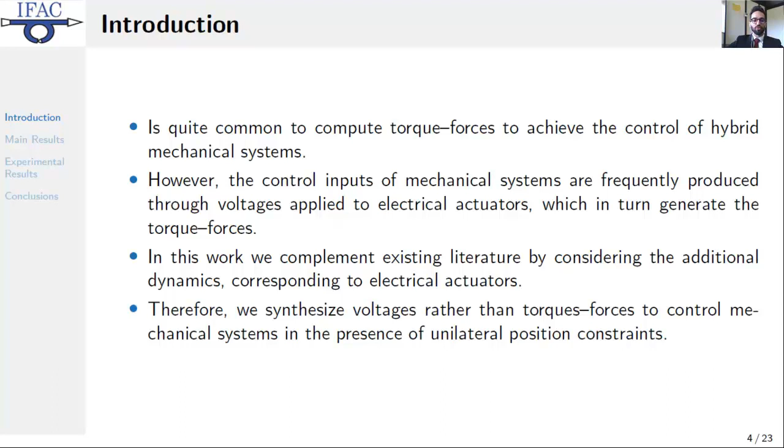It's quite common to compute torque forces to achieve the control of hybrid mechanical systems. However, the control inputs of mechanical systems are frequently produced through voltage applied to electrical actuators, which in turn generate the torque forces. In this work, we complement existing literature by considering the additional dynamics corresponding to electrical actuators. Therefore, we synthesize voltages rather than torque forces to control mechanical systems in the presence of unilateral position constraints.

Now we would like to show our main results. Let's start with the problem description. Consider Euler-Lagrange and actuator dynamics along a unilateral constraint.

F0 depending on position, which is greater than 0. When this is the case, our dynamics are given by these equations, where here we have the system dynamics, and here we have the actuator dynamics.

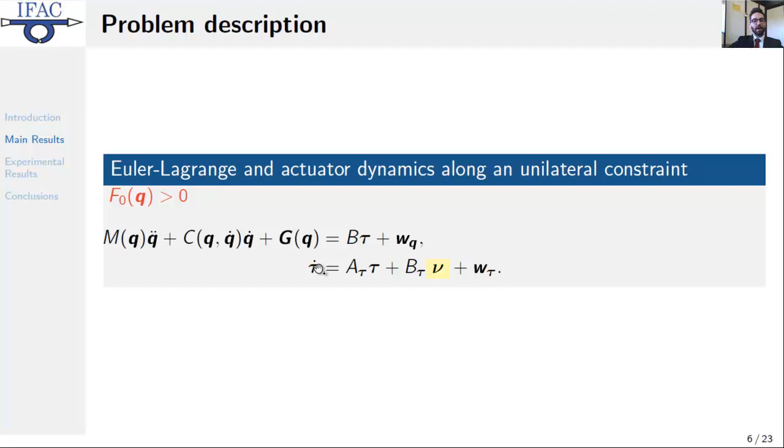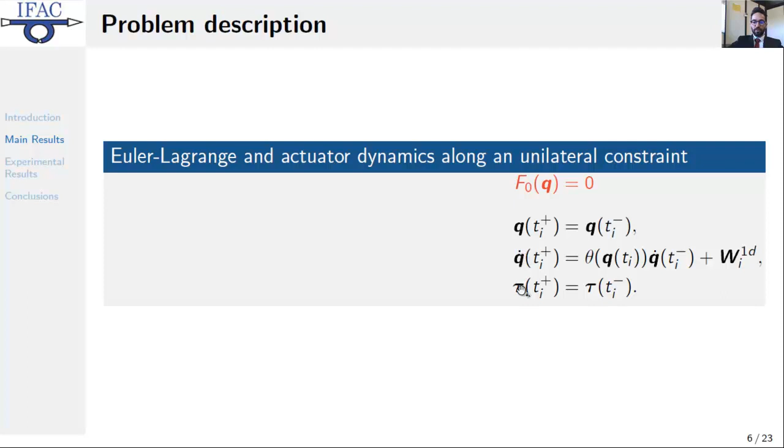Then, when the unilateral constraint is in place, position, velocity, and torque satisfy these equations, where the newly introduced variables W Q, W tau, and capital W are perturbations, and nu is the control input

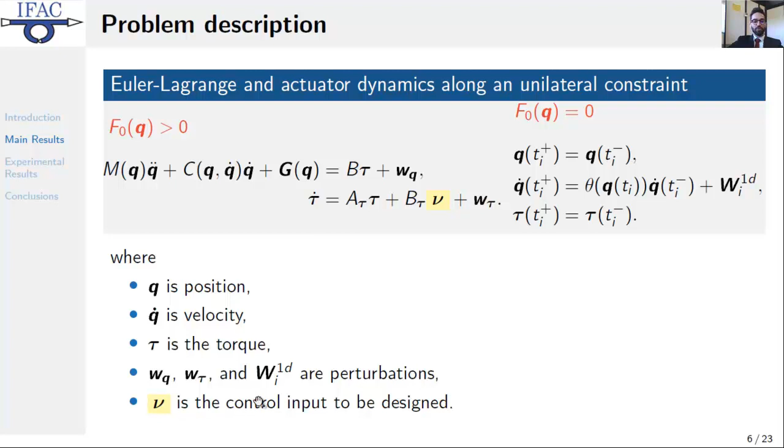to be designed. In the same spirit, the reference trajectory is defined by Q star and dot Q star, and is subject to collisions with the continuous dynamics when the system is outside the unilateral constraint, and satisfies these equations when the reference position and velocity satisfy this unilateral constraint.

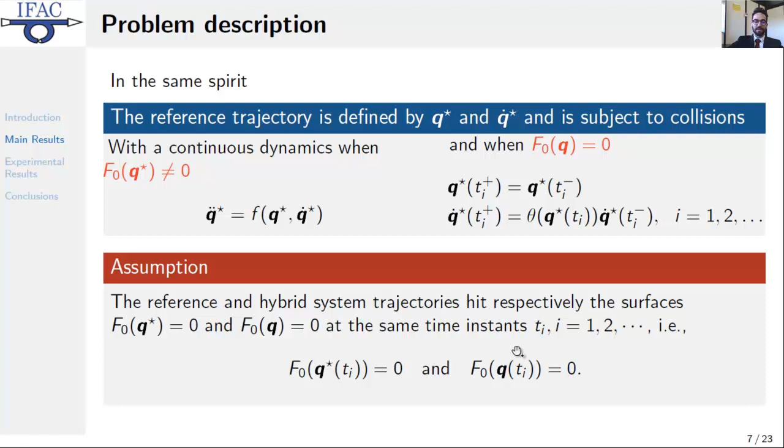We assume that the reference and the hybrid system trajectories hit respectively the surfaces defined for each one at the same time instant. For the controller synthesis, we divide this into three main steps.

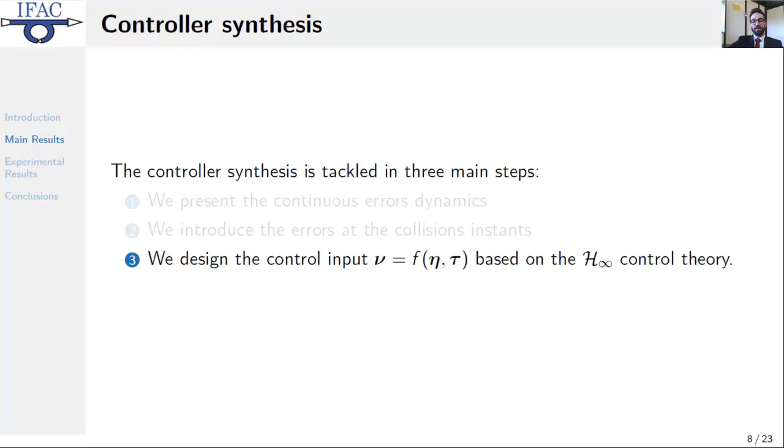First, we present the continuous dynamics. Then we introduce the errors at the collision instant. And finally, we design the control input nu as a function of an auxiliary control input eta and the torque. This is based on the H-infinity control theory.

Let us start with the first step, presenting the continuous dynamics. In this case, we define the position and velocity error variables, as we can see here. e_p is the position error variable, and e_v is the velocity error variable. Then the continuous dynamics, meaning dynamics when the system is outside the unilateral constraint, is given in this form.

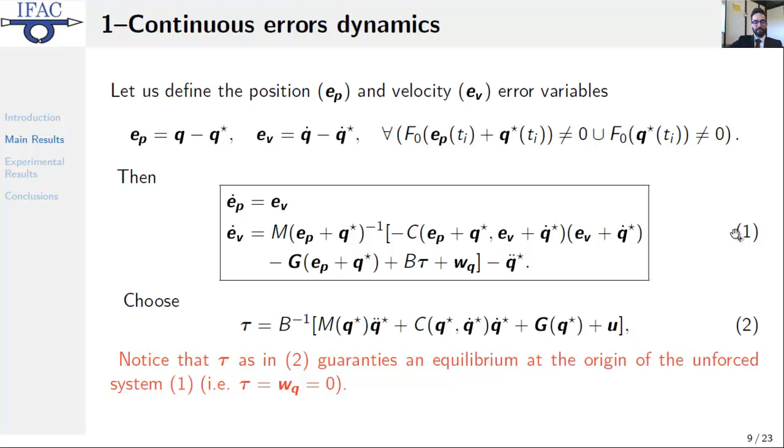Choose tau as in equation 2, where U is a new virtual variable. Notice that tau as in 2 guarantees an equilibrium at the origin of the unforced system 1. This means when tau and WQ are equal to 0.

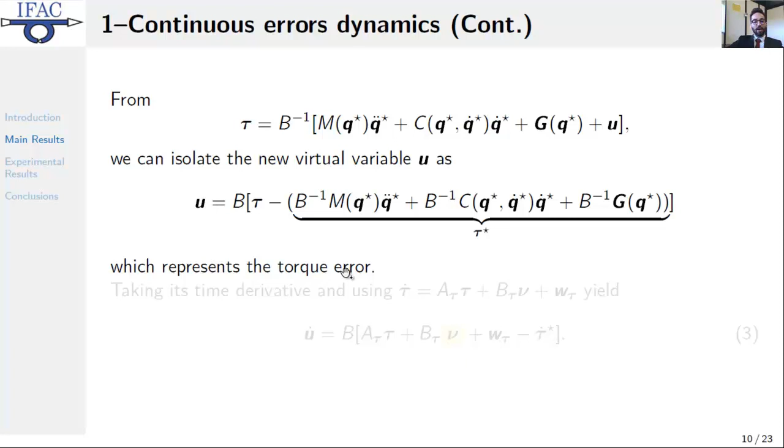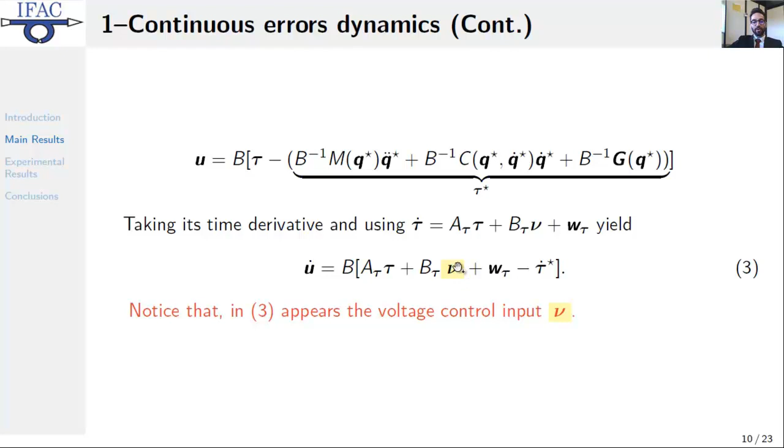From tau, given by this equation, we can isolate the new virtual variable U as shown here. This new virtual variable U represents the torque error. Taking its time derivative and using the dynamics of the actuator yields these dynamics that we're presenting here, where notice that here appears the voltage control input nu that must be designed.

In turn, substituting nu equals this right-hand side into this equation 3 yields this dynamics, where eta is a virtual control variable to be designed. Once we have eta, we have completely defined nu, which is our voltage control input.

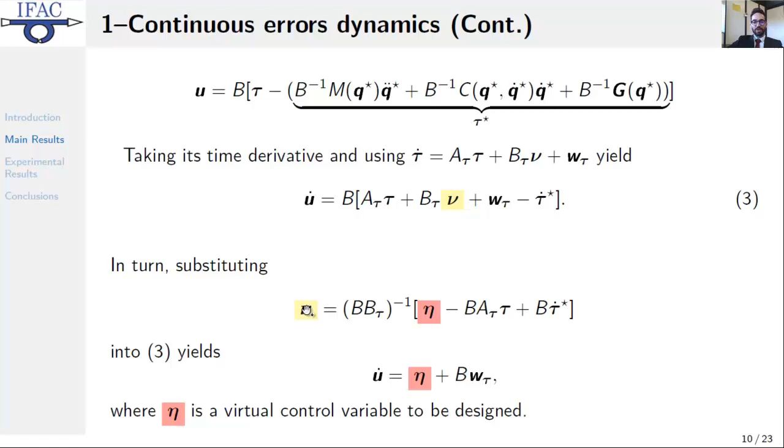We would like to continue by introducing the errors at the collision instant. Position and velocity errors at the collision instant are given by these equations that we are showing here. And the torque does not change during collisions. Therefore, it's straightforward to get this equation here, where W1D and W2D are inherent perturbations.

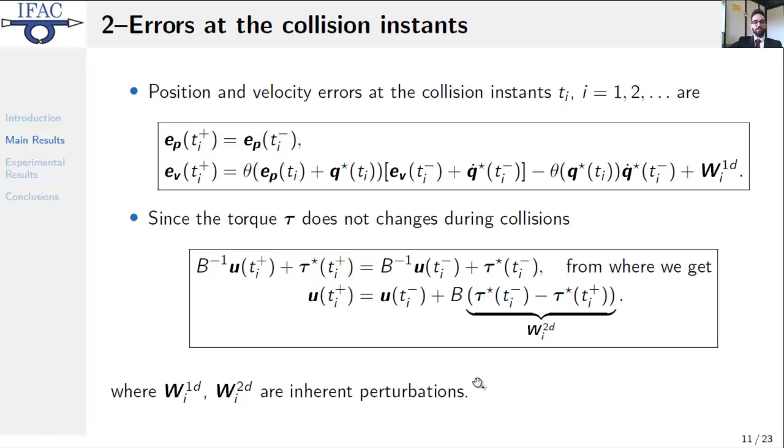Now we would like to summarize steps 1 and 2. From the first step, continuous dynamics is obtained and shown in these equations here, where the states position error, velocity error, and the virtual variable u, and the reference position q star, velocity q dot star, and acceleration q double dot star are available for the virtual control eta design.

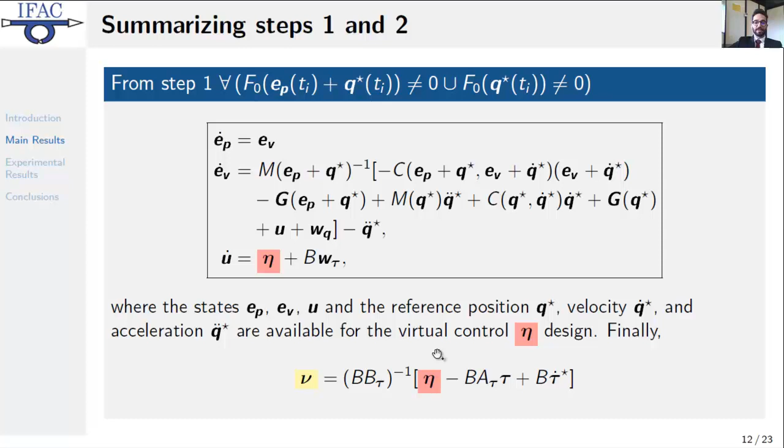Finally, remember that our voltage input is designed as shown in this equation, where the new virtual control variable eta must be designed. From step 2, we get the transitions in the states at the collision instant, as given in these equations here, where once again capital W1D and capital W2D are inherent perturbations.

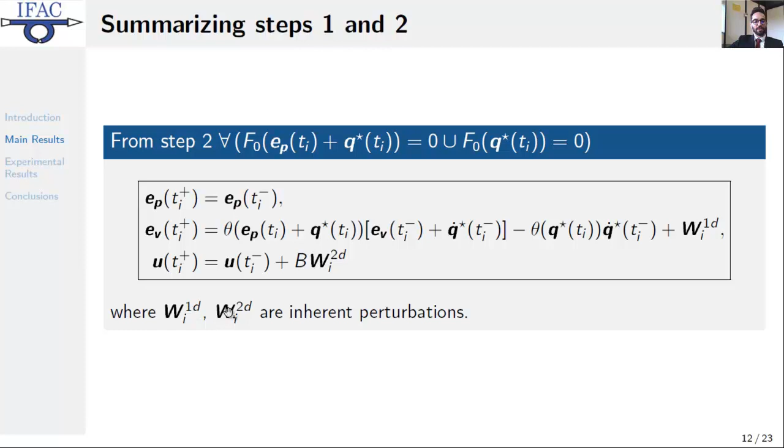And finally, the third step, which is the design of nu as a function of the virtual control variable eta and the torque. We used H-infinity control theory in this case. We base our design of the virtual control eta on previous results in H-infinity synthesis for hybrid systems from Montano, Orlov, and Aoustin in 2014.

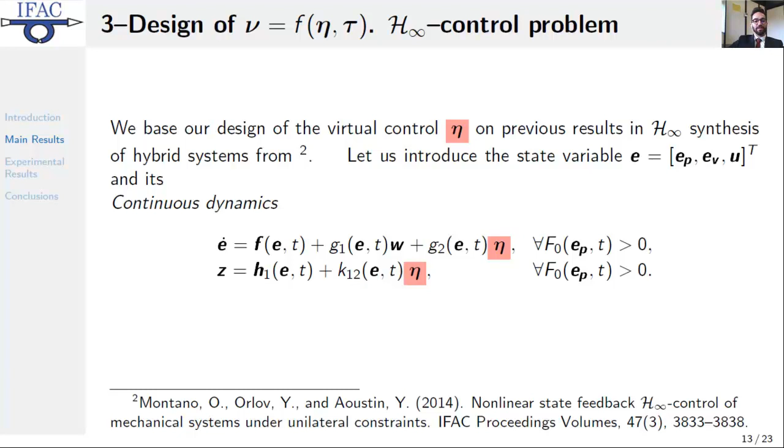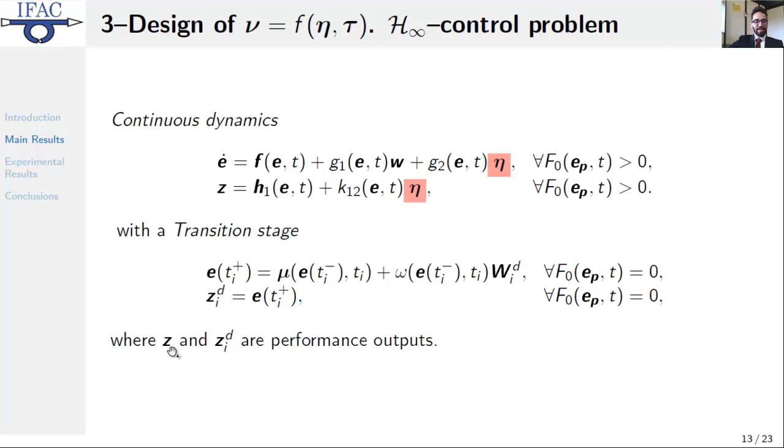To do so, let us introduce the state variable E and its continuous dynamics as shown here, with a transition stage given by these equations, where z and z i d are performance outputs.

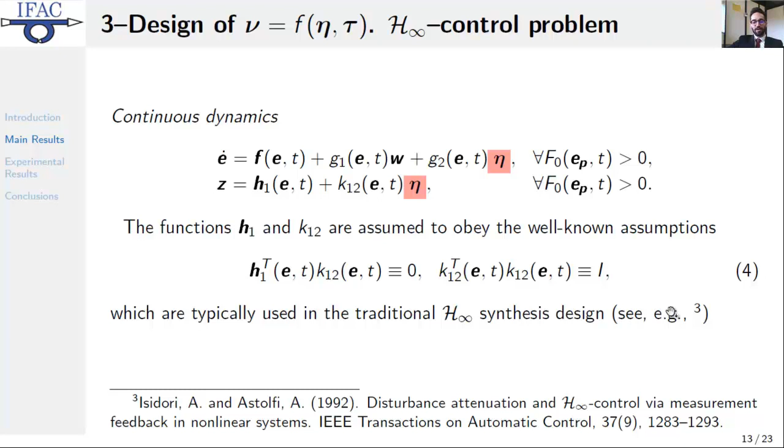The functions h1 and k12 are assumed to obey the well-known assumptions shown here, which are typically used in the traditional H infinity synthesis design. See, for example, Isidori and Astolfi 1992. This H infinity control problem has a global solution.

Consider the causal feedback controller eta as a function xi of the state vector E, where xi is continuously differentiable at least one time, and xi at 0 equals 0. Controller 5 is said to be a locally (globally) admissible controller if, with all perturbations equal to 0, the closed-loop hybrid system in terms of errors is uniformly globally asymptotically stable.

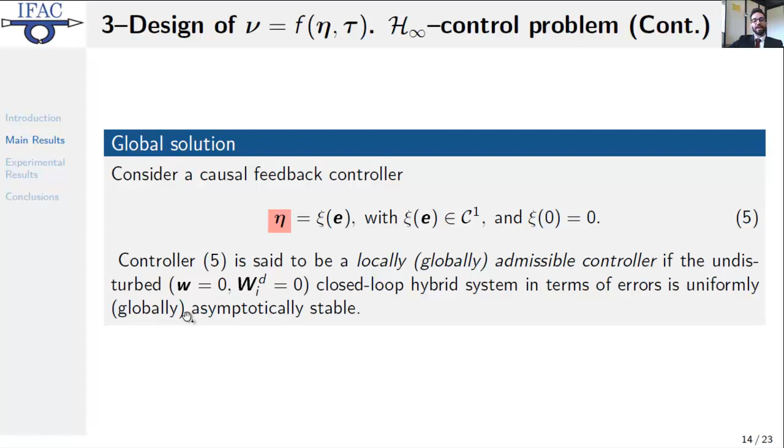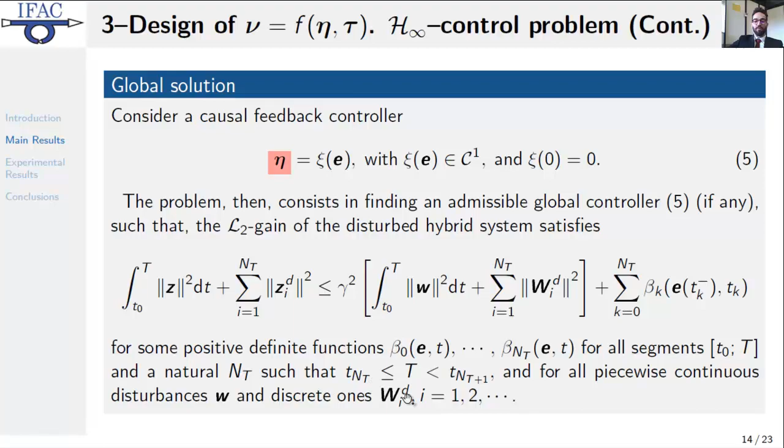The problem then consists in finding an admissible global controller 5, if any, such that the L2 gain of a disturbed hybrid system satisfies this inequality, for some positive definite functions beta 0 through beta N, for all segments between T0 and capital T, and a natural number N sub T such that this restriction is fulfilled, and for all piecewise continuous disturbances W and discrete ones capital W. This H infinity control problem also has a local solution.

Conditions must be satisfied in order for this local solution to be found. Let's start with the first condition, C1: there exists epsilon 0 greater than 0 such that this differential Riccati equation has a uniformly bounded, positive definite solution P epsilon for each epsilon contained in this interval.

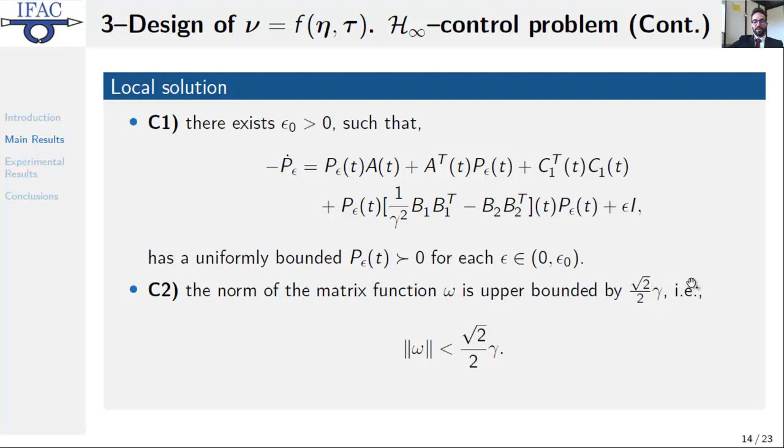The second condition: the norm of the matrix function omega is upper bounded by this quantity, which means that this inequality must be fulfilled. The third condition: there exists a smooth, positive definite, decrescent function V and a positive definite function R such that the Hamilton-Jacobi-Isaacs inequality presented here holds, with alpha 1 and alpha 2 as given here.

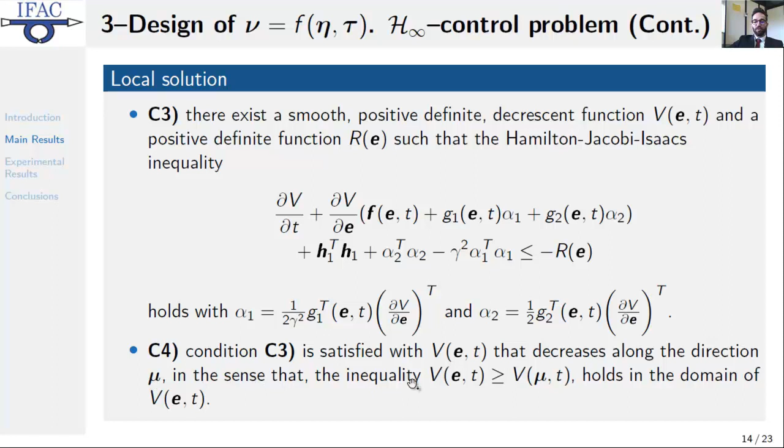The fourth condition: condition 3 is satisfied with V that decreases along the direction mu, in the sense that the inequality shown here holds in the domain of V.

Now we can state the theorem that solves this H-infinity control problem. Let condition C1 be satisfied with some positive gamma, for the error dynamics of the mechanical hybrid system driven by actuators that we have shown before. Then condition C3 holds locally around the equilibrium E equals 0 of this dynamics, with V and R as given here, and the closed loop system driven by the state feedback eta as shown in 7 locally possesses an L2 gain less than gamma, provided that condition C2 holds as well.

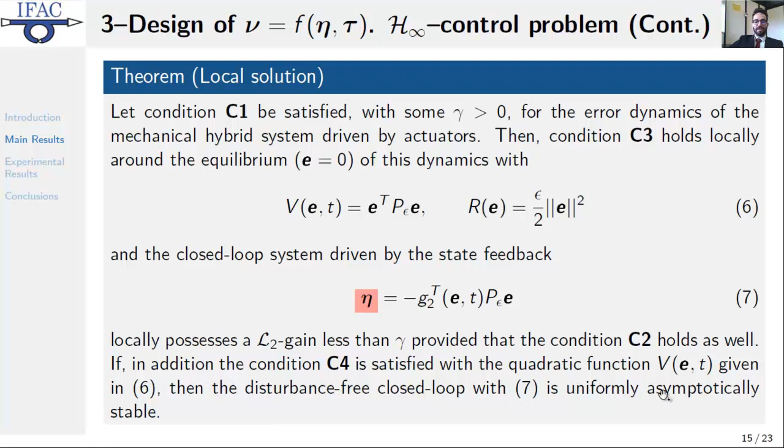If, in addition, condition C4 is satisfied with the quadratic function V given in 6, then the disturbance-free closed loop with 7 is uniformly asymptotically stable.

Now that we have presented the solution to the control of a hybrid mechanical system with unilateral constraints, we are in place to give our experimental results.

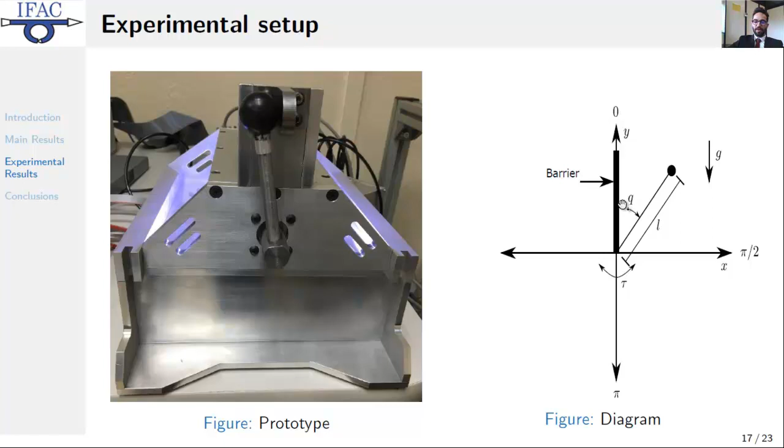The experimental setup consists of this simple pendulum and this unilateral constraint. The system hits this constraint as shown in this diagram. We have a barrier, we have the origin in the upper part of the system, and the dynamics is described by position and velocity of the pendulum.

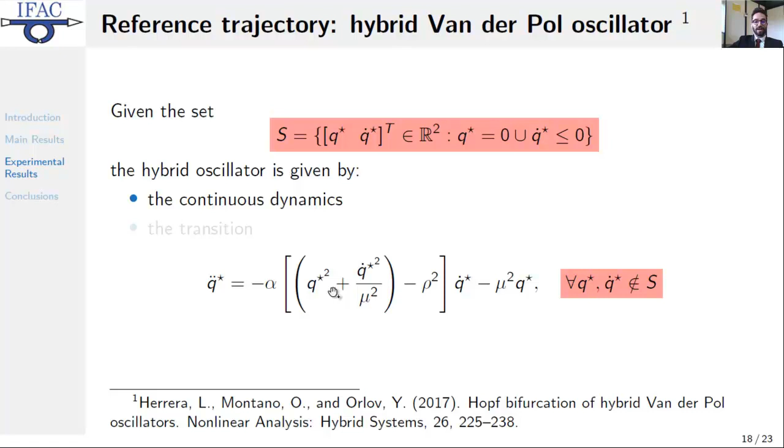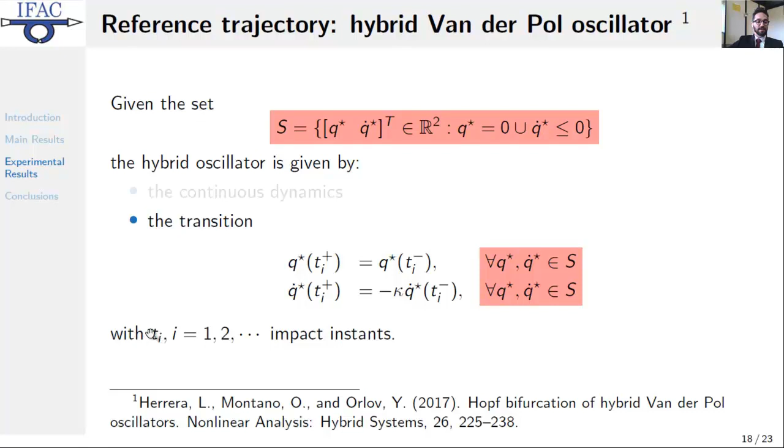The reference trajectory is given by the hybrid van der Pol oscillator. Given the set S, the hybrid oscillator is given by the continuous dynamics shown here outside this set, and by the transitions shown here when the system is inside the set, with t sub i as the impact instants.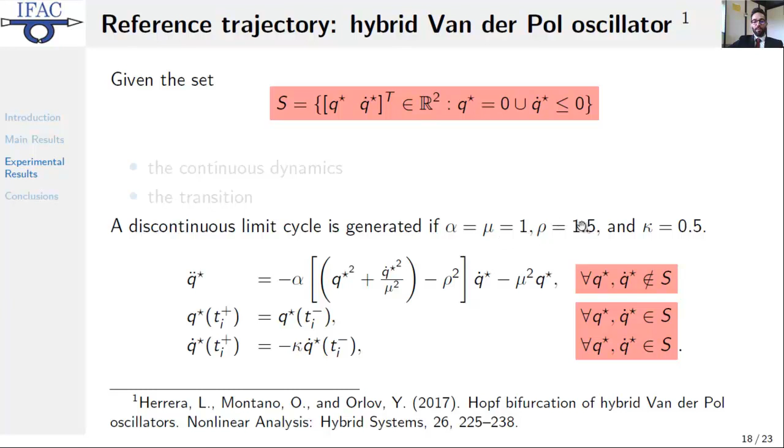A discontinuous limit cycle is generated if alpha equals mu equals 1 in these equations, rho equals 1.5, and kappa equals 0.5.

As you can see here in this figure, this is the velocity versus position phase plane. And in this figure here, we show the phase portrait after the transient, where the position of the pendulum is initialized at the downward position equal to pi radians, and its velocity equals 0, it's stopped.

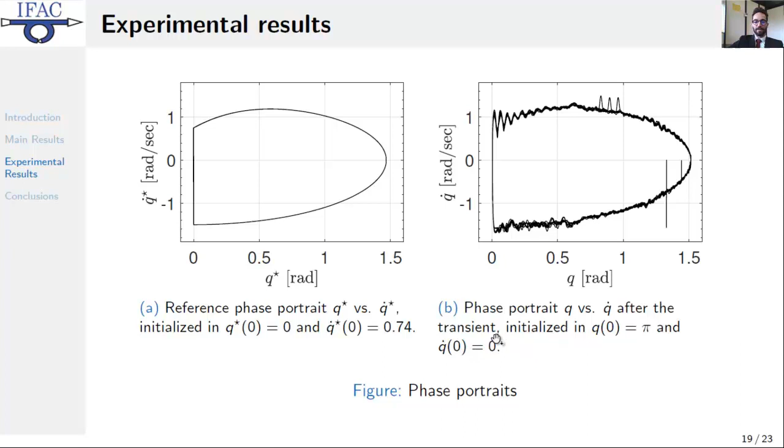The torque generated by the motor is given in this figure, where we show the saturation limits. And in this figure, we show our control input voltage, which is inside the saturation area, meaning maximum value 0.8, minimum value minus 0.8.

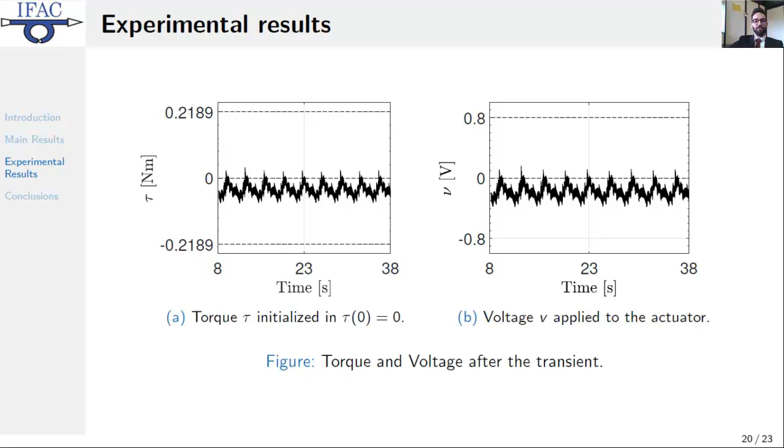We would like to show next a video of this experiment.

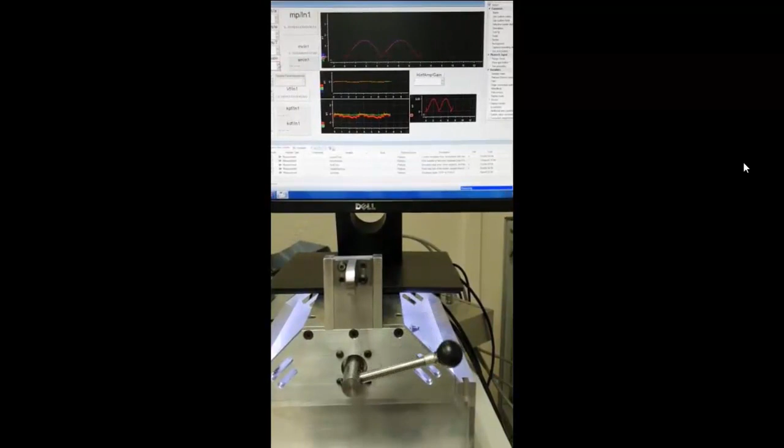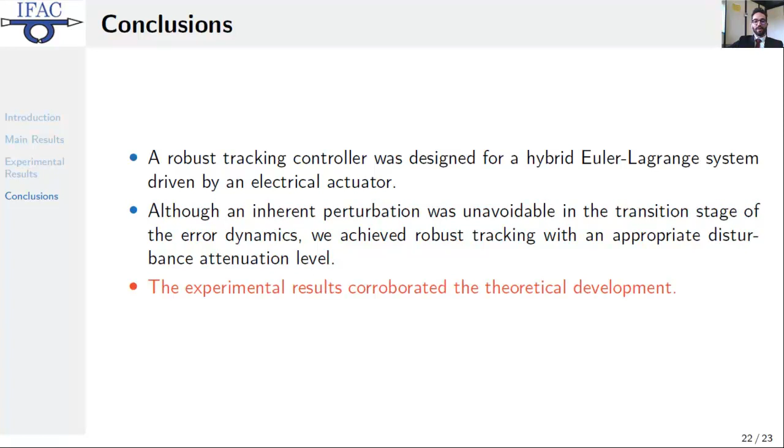Finally, we would like to present our conclusion. A robust tracking controller was designed for a hybrid Euler-Lagrange system driven by an electrical actuator. Although an inherent perturbation was unavoidable in the transition stage of the error dynamics, we achieved robust tracking with an appropriate disturbance attenuation level. The experimental results corroborated the theoretical development given in this presentation.